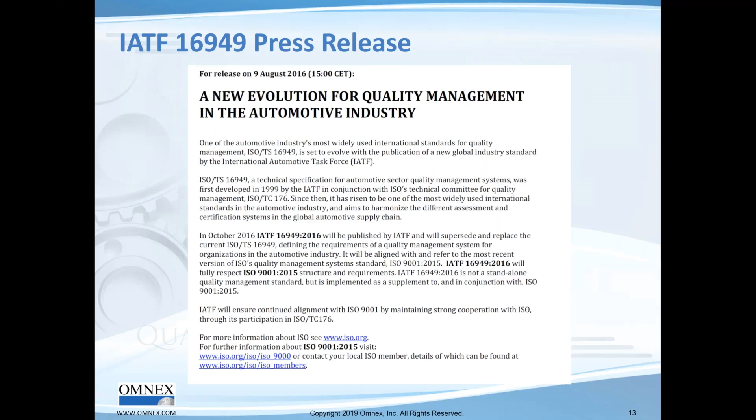Let's move on and talk about this press release that started things off on August 9th. It says a new evolution for quality management in the automotive industry, and it released the standard IATF 16949 in October 2016. If you recall, that standard had major changes in the IATF portion.

At the same time, ISO 9001:2015 changed in a major way. Both these changes, I'll remind you, I was one of the writers of QS 9000, helping Ford Motor Company in the background when QS 9000 first came out. I also did the first worldwide witness audit for QS 9000 as a lead auditor for a registrar.

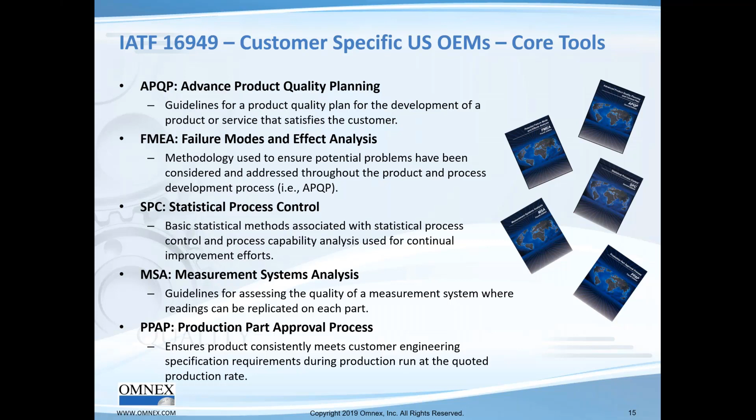So IATF 16949, with these two parts, the IATF supplemental and ISO 9001, the CSR, and the core tools, really makes up this IATF 16949 standard.

We'll look a little later and ask ourselves, how well did we do? So let's hang on.

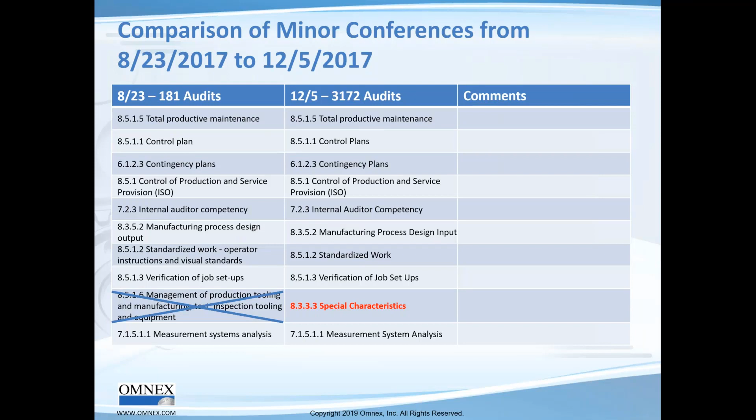First, let's look at the majors and minors. For those of you who have been following these webinars all along, I shared the results of the first audit, the first 181 audits, and then the 3,172 audits. What you can tell about minors is that they're very, very consistent, and there's only one change from the first set to the second, and it continued to be consistent here.

Now, if we had been smart and had this data, which you did, we could have maybe tried to avoid these minor nonconformances, the top 10 minor nonconformances. There's a very slight shift here, and really you see the addition of problem solving. Many of these are in the minor column, but also in the major column.

So what do we take away from this? Just to see what the top items were: total productive maintenance, control plan, contingency planning, and actually the ISO part of 8.5.1. You may want to take a good look at that, and then problem solving. We'll deep dive into four of these a little bit later.

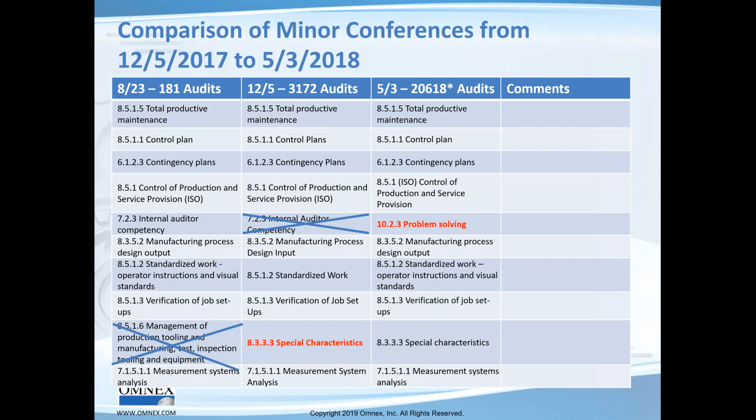Now why are these important? These are important because if you didn't find this nonconformance in your registration audit, it'll probably be there for you in your surveillance. Here is the data on the major nonconformances.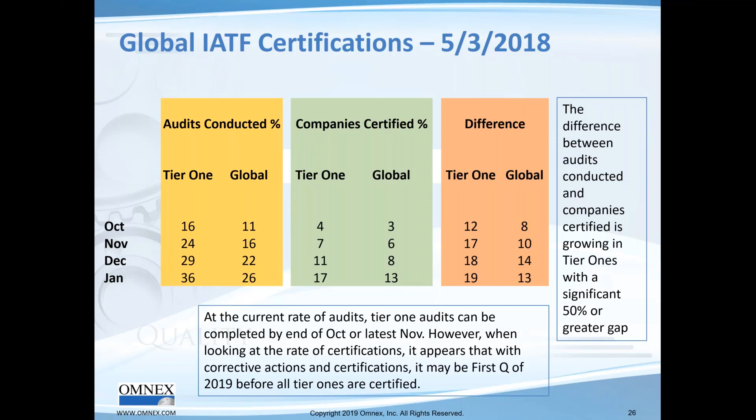So there's a gap of 19%, and that's the time it takes to close out non-conformances—about 3 months. Globally, 26% had been audited, and 13% had been certified. We did not think the tier 1s were going to get finished in time. We thought the tier 1s would take till February of 2019, and globally it would be like April of 2019. I'm going to look at the extrapolation of the data—actually we said globally May 2019, and March 2019 for the tier 1s.

Well, the good news is the IAOB and the registrars got into gear, added auditors, and 97% were audited by August. Remember, the deadline was in September. They got 97% of the tier 1s audited, and 74% of them were registered—still a gap of 23%. And extrapolating that, 78% global, but 60% of the global certifications were certified.

When you extrapolate it, what do we find? We do find that by mid-December 2018—I expect to get data on what actually ensued shortly—by January 1st, all the tier 1s should have been certified. And then globally, we believe by end of March they should have been certified. That's our projection. So congratulations to all of you who got registered, and great work from the IAOB and the registrars. I think we executed it automotive style, and it's a major accomplishment to get all these registrations done.

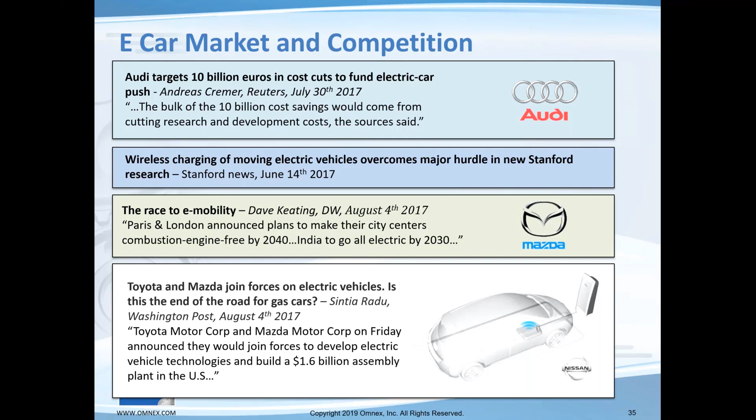So here's the e-car market, and we find GM is going all electric and autonomous. If you don't know, there's a huge push inside GM to go autonomous. Volvo is going autonomous. Porsche says they'll stop doing diesel cars. Countries are saying they will stop allowing gas and diesel after 2040 - France says that. Britain says 2040. I thought I saw India there. Yeah, there's India - by 2030.

Not only are car companies saying it, countries are saying it, and GM and Volkswagen, two of the largest automotive companies in the world, are saying they're going to stop doing gas cars and diesel cars. So we indeed are going to see a complete change in the product mix and what each of us are going to be manufacturing as we are part of the supply chain.

So what does this mean? Well, really what the pundits are saying is that as the autonomous car comes into play, the level 5 autonomous, we will be going into what they call mobility behavior, or we'll be sharing cars. So we share cars - will the car market go up or down? What they're saying is the car market revenue is going to increase by 30%. A huge amount of new revenue coming in, and it's for the taking of who is able to come in and make the cars of the future.

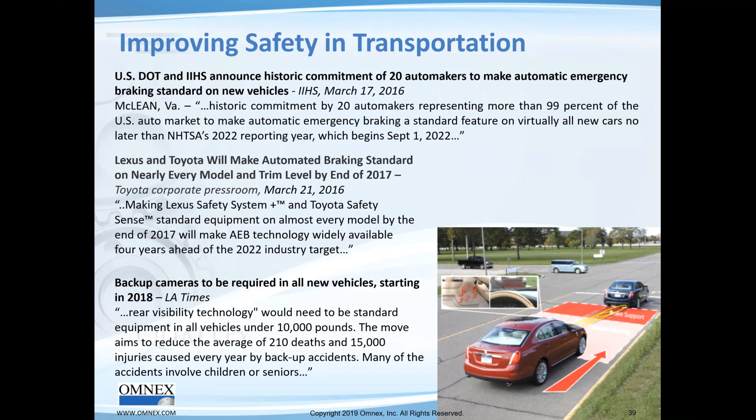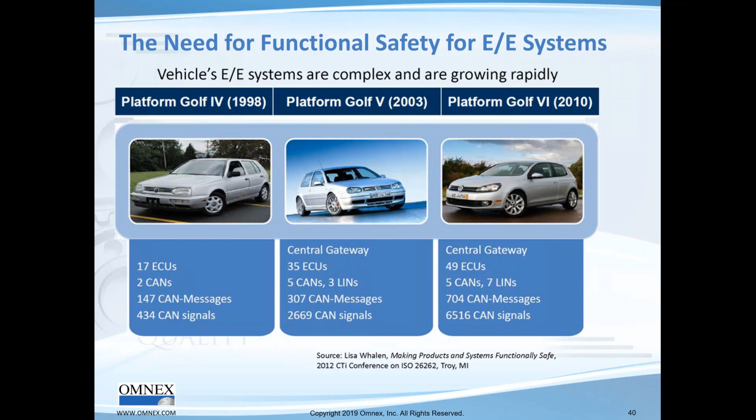All right, let's go on. What is changing then? The amount of hardware and software inside a vehicle is changing. Look at this change over 3 different versions of a car - look at the number of ECUs, CAN messages, CAN signals inside a car. And folks, that is going to show a steep upward curve as we look ahead.

And what else is happening? The amount of electronic content is going up in cars, a dramatic shift from 2010, from 30% to 50%. Now we understand why suddenly software suppliers and hardware suppliers are all coming into the industry, including semiconductor companies who gave up on automotive, are all making a quick beeline to come back in.

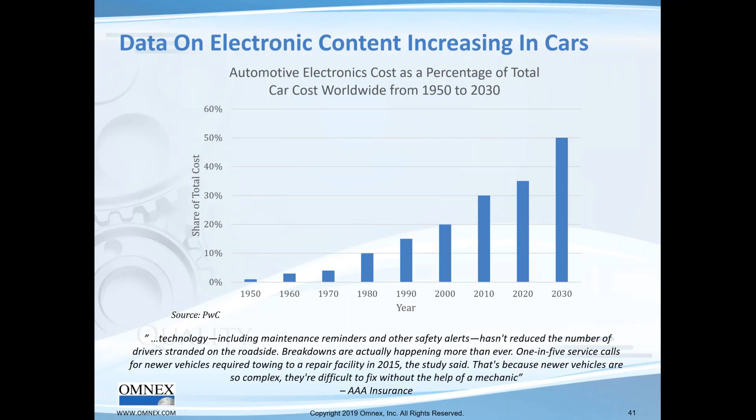I thought it's not that funny, but I wanted to show this AAA comment at the bottom, that folks trying to fix these new vehicles cannot fix them because it's become quite complicated. So drivers are getting stranded, and you can see software is coming to take the blame for 15% of car recalls. You saw this very clearly in the current Boeing news, which is a functional safety issue, and it's a software issue.

Software and hardware overriding. The sensor is giving the wrong signal, and the plane is going up, the plane is going down. And the controllability factor, which is very simple, where the pilot could have just turned off the system and taken controls, didn't know that they could do that.

So 15% of warranty recalls are now software related. As you well know, 26262 has squarely hit semiconductors, and there's a Part 11 guidance for semiconductor companies.

Let's go away from the slide with the thought here that typically in mechanical systems, you have single point faults that we actually do in the FMEA. Now, with the multi-point fault tree analysis as a tool, it's really something we're all going to have to get used to, because this is what happens when you have electronics, hardware, and software in a vehicle.

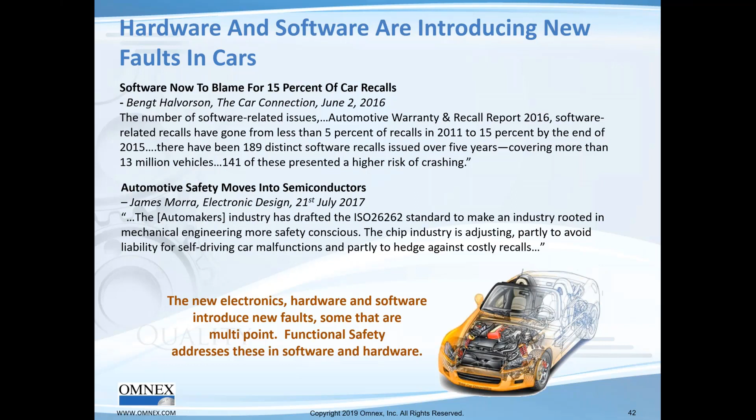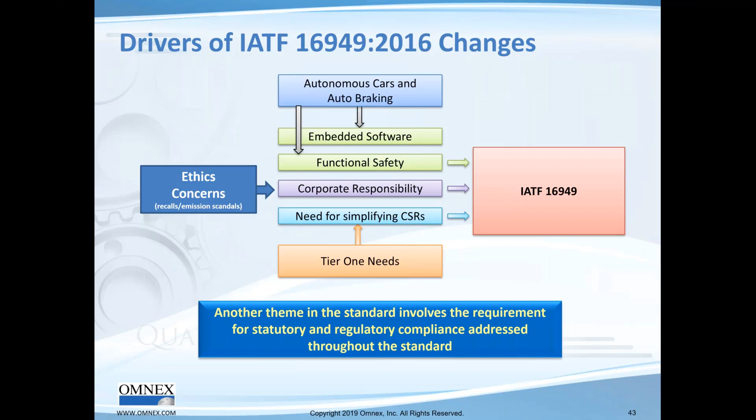So what did we see? We saw embedded software and functional safety make some inroads into the IATF. What we predict is much more in the future, software and functional safety will become key themes that go into the IATF 16949.

What else is happening with this key and critical change? Suddenly, these standards that your company was not familiar with, now you need to start becoming familiar with. One of them is ISO 26262.

And if you say, well, we don't have safety products, I can tell you right now, when you go into autonomous cars and electric cars, your product will soon become part of the autonomous driving, autonomous steering, electric battery system, something of that sort that will require 26262.

And if you're not doing software today, you better learn how to do hardware and software if you want to be a part of this industry supply chain.

And you need to know ASPICE, which is a requirement from Ford and a requirement from the European OEMs. The IATF 16949 requires a disciplined process for software, and you had a choice of ASPICE or CMMI. Of course, with this many customers saying ASPICE, just take it as a given that it's ASPICE, okay?

Let's leave this second part of the webinar with these announcements. There are some structural changes needed in the management system. One, due to the amount of new technology in electronics and software, there are many new entrants to the automotive supply chain. Many new entrants.

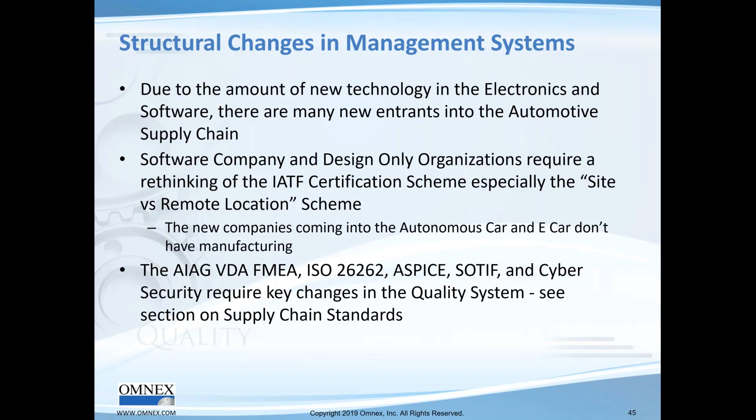AIAG VDA FMEA, ISO 26262, ASPICE, SOTIF, and Cybersecurity are the new standards that are going to come in, which will then influence IATF 16949. So we'll segue next after this slide. It is the last slide in this section, and I was challenging all of you, saying, what, are you not a safety product?

Just about everybody who's doing anything anymore has safety products, meaning as the car industry goes into electric and autonomous, the suppliers will have to start producing products that support autonomous cars and electric cars. By the way, if you don't see any change to your product and your product mix, it may be an indication that you're in a dying market, and you may need a product change.

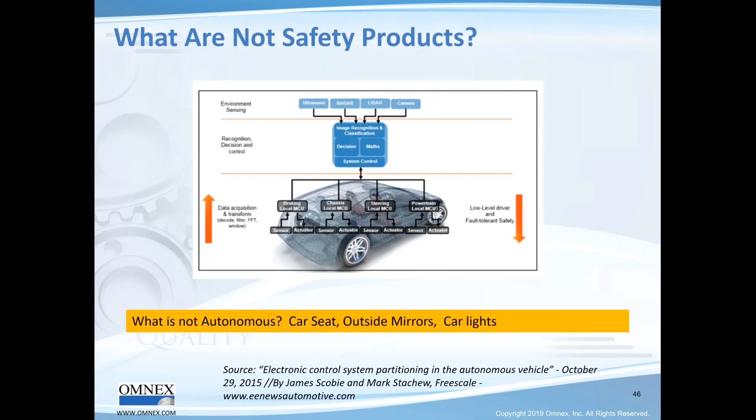Even Omnex is taking on functional safety design. We have started a division that's going to be looking at functional safety design with SOTIF, ASPICE, and cybersecurity, because this is what our customers are asking us to help them with, and we think it'll make us better in doing implementations.

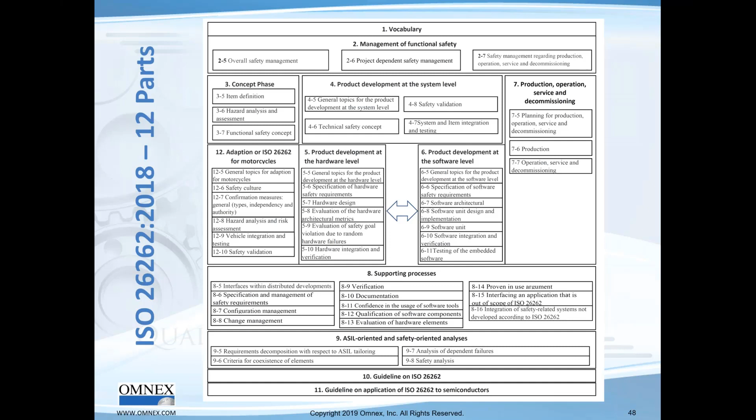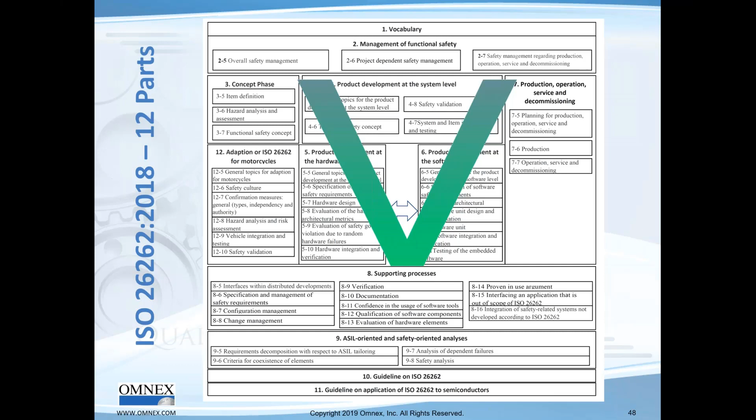As we go towards autonomous and electric, suddenly you see the idea of the V. The V is about the system development that passes requirements to hardware, and then from hardware to software, and the testing needs to follow this V back up. If you didn't know this, it's important, there's two V's for hardware and software.

If you're the systems developer and you're giving hardware outside the company and software outside the company, now you guys need to be working together. Do you understand that? That's why we're calling it a supply chain standard. This level of cooperation has not been there in the automotive industry, so we are going to need to change the way we work.

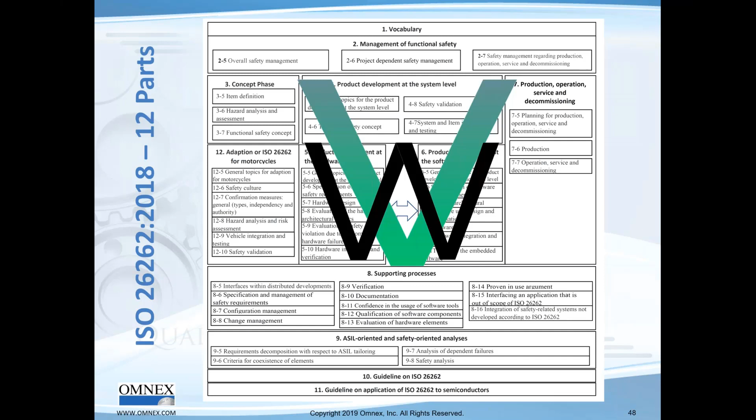If the performance limitations to the functional design, or misuse to the functional design, or something from the car surroundings, other users, environmental conditions, electromagnetic interference, all of that will affect the function. You need to do not only 26262, you also need to do 21448.

Now, what about cybersecurity? Cybersecurity, folks, is the scariest part of things, where people will successfully attack and exploit the vehicle security vulnerability. Cybersecurity is unlike SOTIF and 26262, because the people trying to do malicious attacks are going to keep changing the way and become more sophisticated, which means the car that's out there for 10, 12 years needs to be modified on an ongoing basis. It really calls for downloads of software in a very easy way from the customer to the car driver. There are some major implications here because of the way the car is going to be in the future.

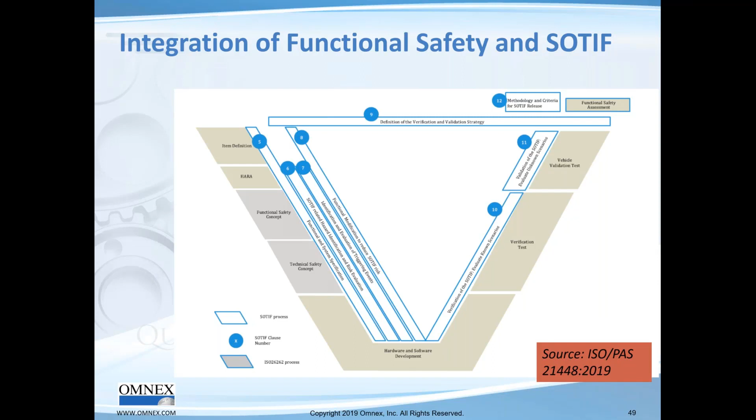So it's a very exciting time for all of us, in that we'll be breaking new ground into thinking about this and how to deal with it and how to integrate this back into our new product development process. Folks, the worst thing we can do is create silos around each of these and do duplicative work, which is inherently inefficient, and not only inefficient, but will also cause structural issues in design.

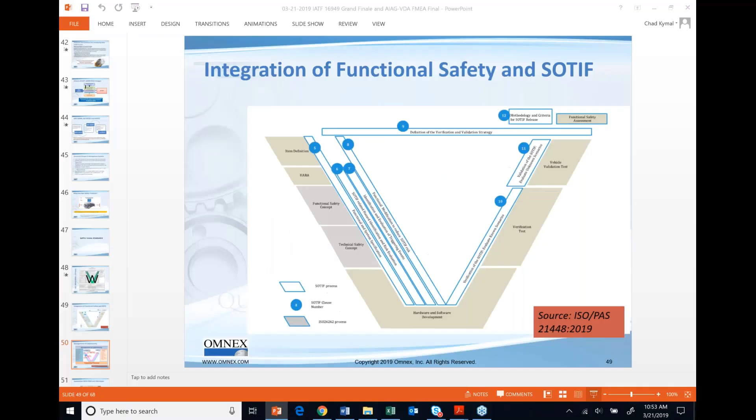So we have the SAE J3061, and we're one of the writers of that - Omnex is a member of this new standard. I'll just go back because of all the different names.

ISO 21434, I myself have a copy of the draft, but these are some new standards - the cybersecurity standard. That's the ISO cybersecurity standard that is being developed as we speak.

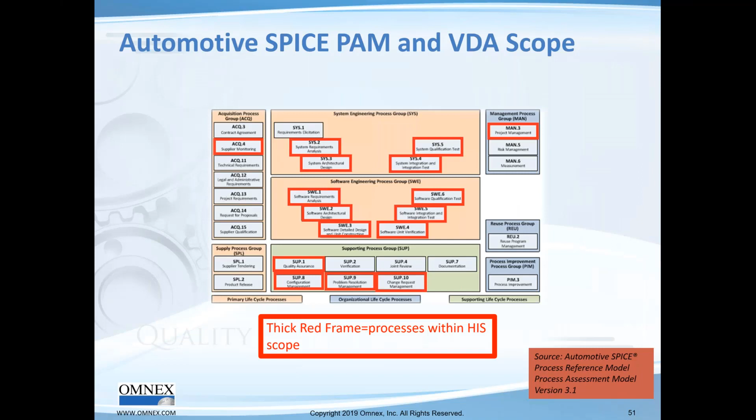So what is the point here? There are new standards to deal with the way the product is changing. What product? The vehicle - electric cars and autonomous cars need 26262, need SOTIF, and need cybersecurity. And because there's so much software now in a car, we need to put disciplined processes into software development that we call SPICE, Automotive SPICE.

One of these supply chain standards that's going to be impacting us in the very near future is actually AIAG VDA. One of the changes has been the 7th step, results documentation. Our experts here, Greg Gruska and Mike Down, tell us that the results documentation step was always there, but has become now more explicit. So here are the 7 steps.

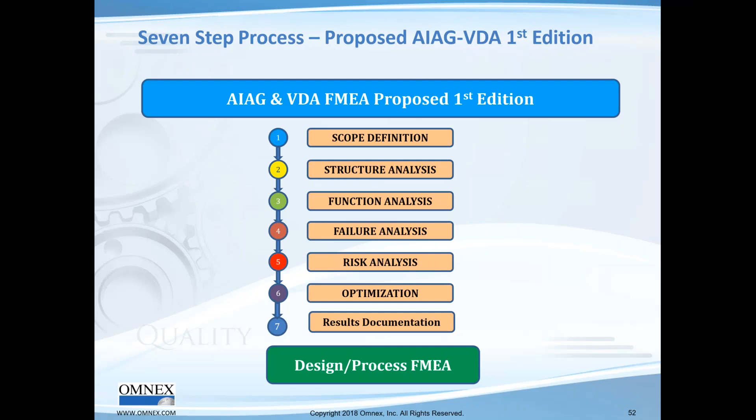Let's go take a look at step 2, structure analysis, which is going from the car all the way to a component. What we don't see here, and we don't see in AIAG or VDA FMEA, is that they don't show software and hardware. So they also need to understand the car is more than mechanical - it's hardware and software, and it'll have to be put into the structure.

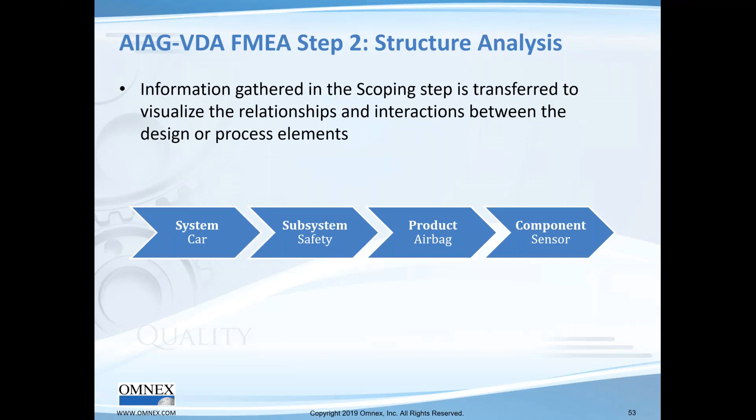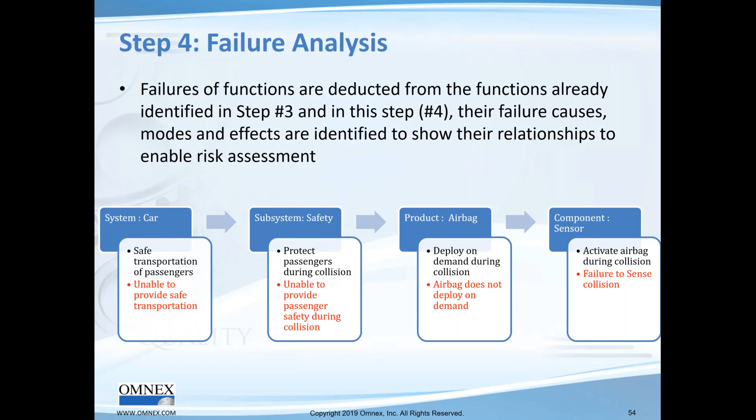What is the point I'm making here? That the AIAG VDA is essentially a supply chain tool, right? That connects up customers, suppliers, and their sub-suppliers. Same thing with the failure analysis - there's a cause and effect relationship between each level, but at the end of the day, it goes all the way down the supply chain. So AIAG VDA is part of this change of going into supply chain standards.

So let me share with you some updates on the AIAG VDA. The US OEMs were holdouts. Ford agreed first, and recently GM and FCA have also agreed. There will be some CSRs - let's wait and see. We believe it will say that the FMEA will be optional. We definitely know that the AIAG VDA FMEA will be optional. We definitely expect that from the GM side.

Let's continue. We do believe with where the standard is today, as it's getting translated, there is some work still that needs to be done, but it's very minor work. The standard is already being translated, and our expectations are that this standard will come out in May.

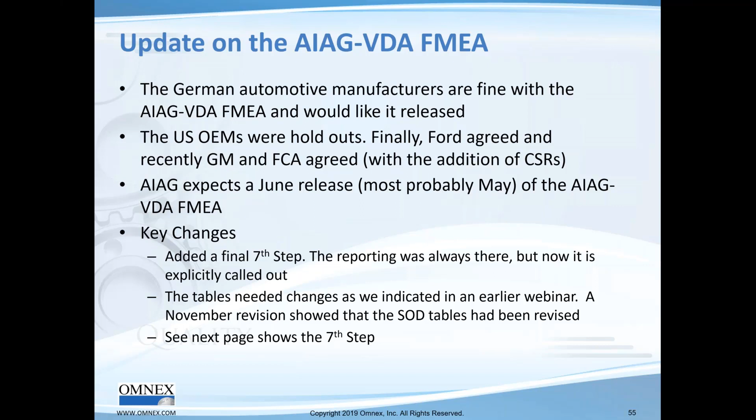What are some key changes? When we looked at the standard in the November revision, we saw that the SOD tables had been revised. Recently, they added a 7th step. This 7th step is really a communication of actions taken to reduce risk, and we can ourselves decide - it's like a should, recommended. We can decide how we want to do it.

Executive summary, scope of the FMEA, what are the tables we use, what are the recommended actions - we call it action priority - what is the action priority list, results and conclusions of the analysis. And documentation of actions also needs to have the effectiveness. The content of the documentation fulfills the requirements of the organization, the intended reader, and the relevant stakeholders, and so on.

Now, I saw one of the questions was you wanted to know more about the AIAG VDA FMEA. We have Mike Down, who was the chairman of the 4th edition committee and is now actively working on the SAE FMEA standard, who will be doing a webinar on how to be prepared for the new AIAG VDA FMEA. Folks, it's a major change for all of us.

And the supply chain standards as a whole require key changes in our own quality management system. One is a good idea of your architecture of how you gather requirements. So Omnex would say your product is defined by functions - functions have requirements, requirements have characteristics. Characteristics get controlled in the assembly plant and the manufacturing plant.

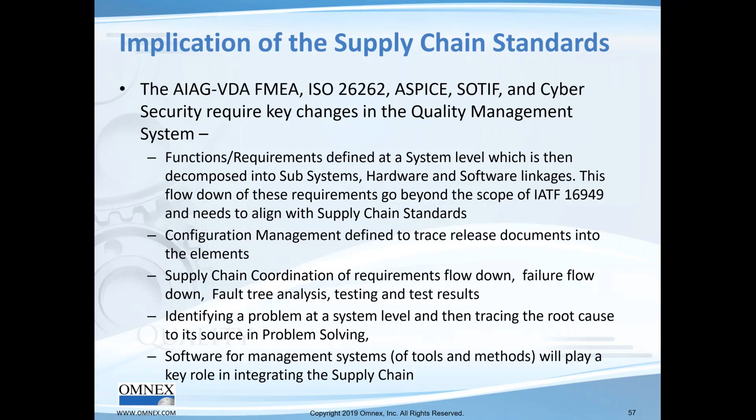Then what else do we need to add into our quality management system? Configuration management is not currently included in IATF 16949, but it's definitely there in ASPICE, which looks at software and system. It's something we need to think about, our companies need to do. And then we need supply chain coordination between ourselves, our customer, our suppliers, and their suppliers. So with the fault tree analysis and requirements flow down, we can identify a problem and trace the root cause down to its element. And folks, our thoughts are that the only good way to handle all this is to have software for management systems. It'll play a key role in integrating the supply chain.

So I'm actually a little bit ahead of my time, so let me pause here. I have two last slides as a summary. What I'll do here is also pause and allow you to ask questions, and maybe I'll answer some of your questions before we do the last two key slides.

So one of the questions being asked is, what does VDA stand for? VDA is an organization just like AIAG, in Germany. And folks, it is a long German word, and I don't quite recall the whole name. Just like I cannot say HIS, which is a scope for ASPICE that's been changed to the VDA scope now in ASPICE. HIS is also a long German word. So VDA is a long German word standing for the Association of Vehicle Manufacturers in Germany, and they're equivalent to the AIAG.

In my organization, IoT 4.0 is being implemented. Do we need to include failure modes related to this in our PFMEAs? Let me think about that. When you say IoT 4.0, Karina, it's not clear to me what you're doing for Internet of Things and if it's affecting your product. On the other hand, let me think again. Will it go into your PFMEA? Yes, it could, because the IoT may be vulnerable to cybersecurity attacks. And your IoT then might be just like an overhead crane, you know, it could be a cause of something going down in your plant. So from that viewpoint, I think it may be important, or I need to know a little bit more of what you're trying to do.

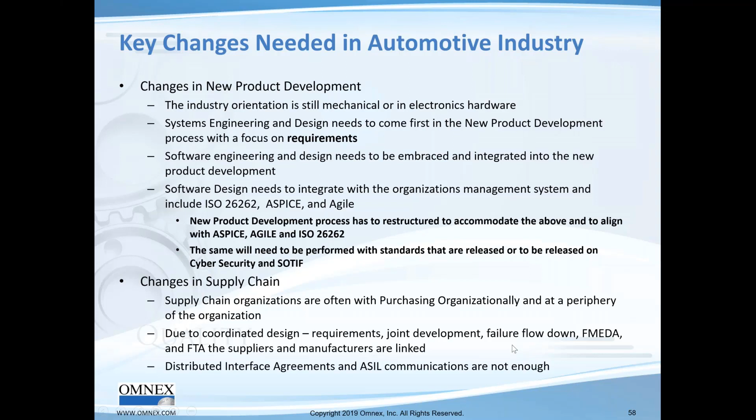So if what I told you today, many of these terms are really new to you, it is a sign that your team and your group and yourself need to change and learn where this industry is going and what are some of the key things that you're going to need for your own competency as the industry goes towards electric and autonomous.

We'll do this last slide, and then we'll come back as time allows. We ask more questions. So, what can we say?